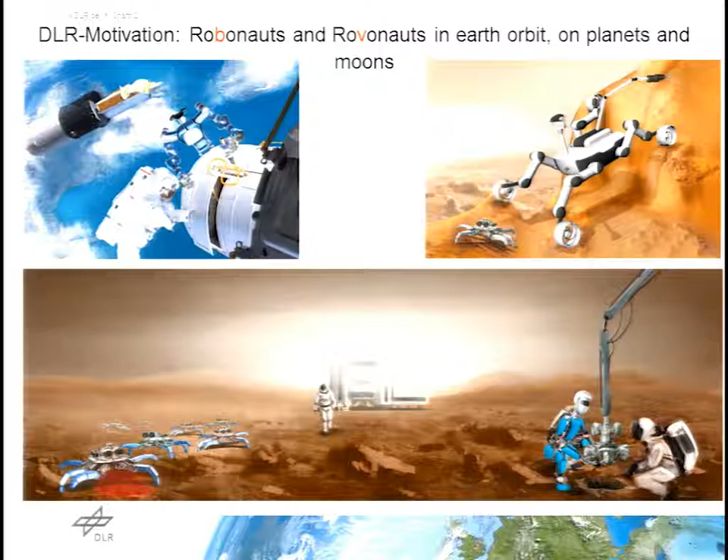I will speak about actuators for robots interacting with humans and unknown environments. Our primary motivation as an institute working in space is to design robots which can interact with completely unknown environments like planets and moons, or are able to interact with humans, with astronauts, to solve complex manipulation and repair tasks.

But of course, generally, the idea of having safe and reliable helpers to humans is as old as robotics, and Isaac Asimov's literature with his famous laws of robotics made this popular. And actually, in direct line strictly related to that are some science fiction movies.

And of course, we would like this robot to move at velocity and performance which is similar to humans, but probably most robotic people watching this movie ask themselves, what would I put into that actuator to have a robot which is that slim and as fast as it is today? And will we succeed in 20 years from now to build something like that?

So this is what my talk is about, our activities towards actuation. I would like to highlight mainly two perspectives in our evolution. We invested in the last 20 years some time in designing lightweight structures where we focused on the mechatronics design, integrated modular components. The main feature is the fact that they have software-based compliance using torque sensing.

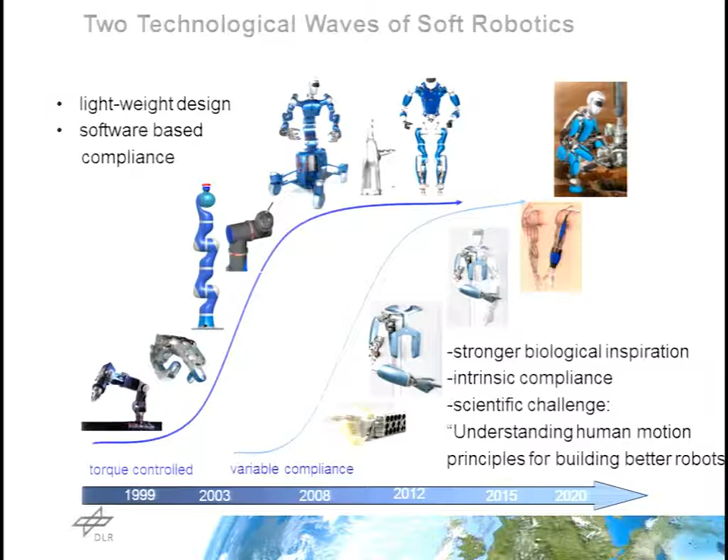So just to summarize the technology which is today considered state of the art, and we were one of the institutes pushing this technology forward, it's standard mechatronic design in the sense that we have brushless motors, which are optimized for high torque at low velocity, harmonic drive gears, but most important, we have the torque sensor, which is placed after the gearbox and allows for compensating of friction and reducing the inertia, such that you have an almost ideal torque source, which has been the dream of robotic control designers for many decades.

And still, these robots intrinsically, parasitically so to say, have some compliance. So you need the torque sensor also to compensate for this elasticity. But this comes parasitically with the lightweight design and was not introduced by purpose at that time. But still, we had to learn how to deal with this compliance, and there has been some seminal work of Alessandro De Luca and Mark Spong, which helped us in that way.

And on top of this torque interface, we have compliant control, again based on great work of Neville Hogan and Oussama Khatib. Stefano contributed a lot to compliance control.

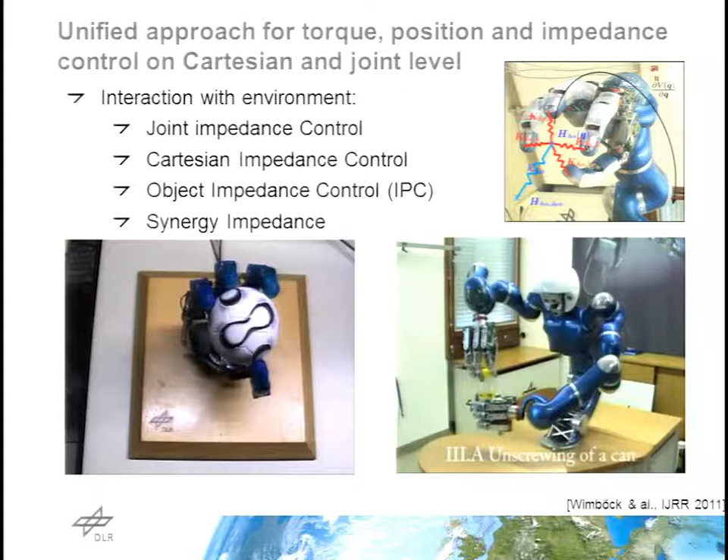The basic idea is that you have virtual springs, which you attach to the rigid robot in order to grasp objects. You would attach springs to the finger, to the middle of the object. And then you would transform those virtual spring forces to joint torques. This is a very simple concept, but can be hierarchically extended to grasp with two arms, to move objects around in several hierarchical structures.

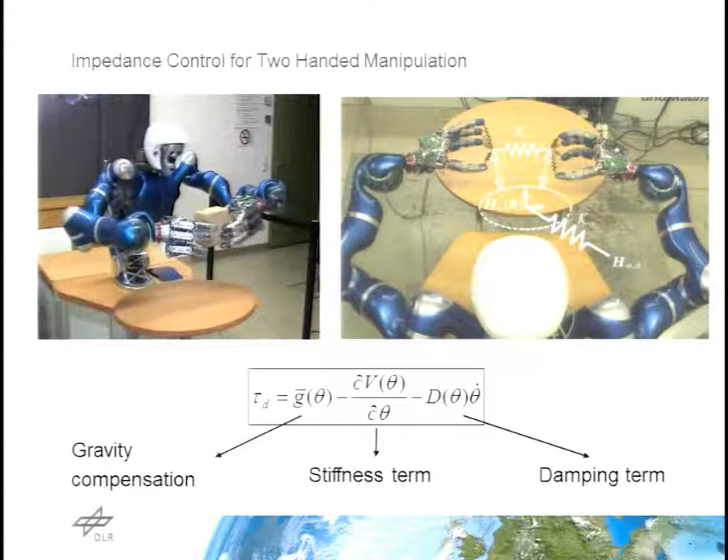And you always do the same. You compensate gravity mostly based on motor position, but you have to take into account the elasticity. And then you have one component which is related to the derivation of the elastic potential, and by deriving this with respect to the joint position, you provide joint torques, and then you add some damping.

This is pretty simple, but we extended this over the last years to more and more complex structures, like the humanoid with 43 degrees of freedom. And here you can see hierarchical tasks: the robot holds the position, follows the human, avoids collision with the second human, avoids singularities, controls the posture, and so on and so forth. But you have to keep in mind that all this structure is purely implemented by control, and the robot is more or less rigid.

You can use torque sensing to detect collision with high accuracy in order to provide a safe robotic system, and this was what we had to deal with when commercializing the lightweight robot technology with our partners from KUKA.

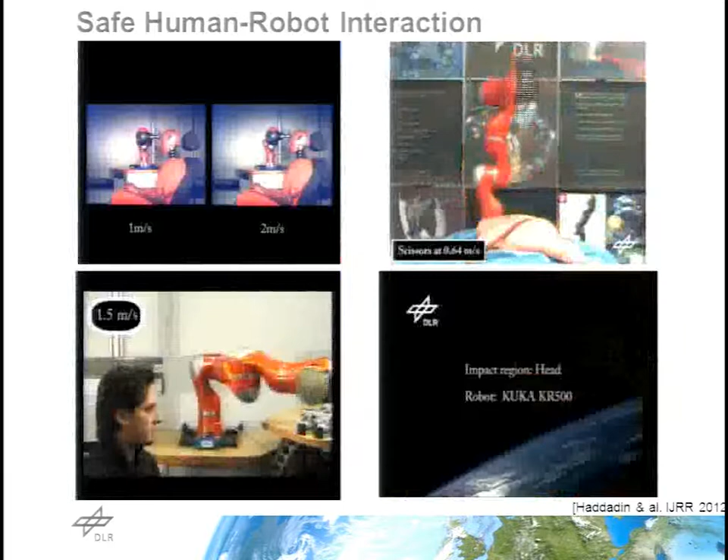This technology, because of its modularity—the whole electronics and mechanics placed within one module—could be extended to more complex humanoids like Justin, and to other application areas like medical. We spent a lot of time commercializing this technology. Many of you know the robot.

The last prototype I would like to show, since I started by motivating with humanoids, is the work done by Christian Ott and his group integrating the lightweight robot components into a humanoid. He started this work after spending time in Japan in Yoshi Nakamura's lab, extending the work we've done on manipulation for several years to balancing on uneven ground.

Intuitively it is clear, but he has methodologically shown that grasping and balancing are closely related—it's a dual problem. Balancing is as if you were manipulating the ground.

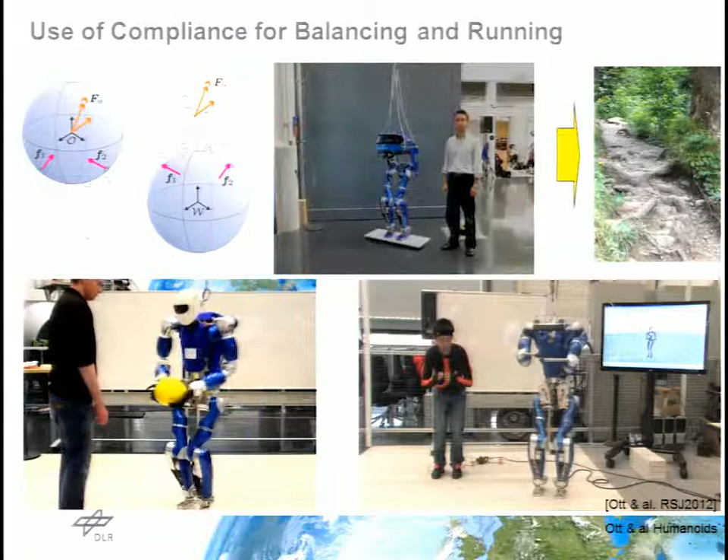Of course, we are not the only ones doing humanoids with torque interfaces, especially with hydraulic actuation. There has been impressive work starting at Sarcos and newer work with Atlas from Boston Dynamics. They use hydraulic actuation with precise torque sensing, and all those robots have very good control performance. However, they have limited power-to-weight ratio, and this is particularly true for electromechanical actuators.

This was one of the main messages at the IROS workshop on actuators, where we saw that many designers still struggle to design actuators that preserve the performance of electromechanical actuators or electric motors, which is very high but drops as soon as you attach gearboxes, becoming much worse than human performance. So we are still searching for ways to improve torque at low velocity in order to achieve biological performance.

One other drawback is important for these systems. If you look at these pictures, you'll notice there's always a cable suspending the robots to prevent them from falling down. Everybody knows why: if such a robot falls down, the control compliance is not fast enough to react, so most probably the robot will be damaged. This is seen in this unfortunate video of Asimo, which is probably the most advanced humanoid—you notice all the controlled compliance and adaptability disappears as soon as software or hardware fails, leaving a rigid piece of metal that will probably break as soon as it falls down.

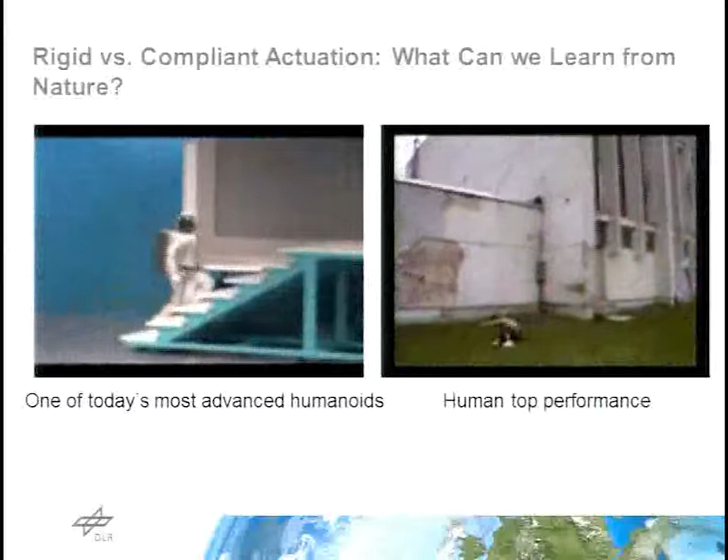This is, of course, in striking contrast with what humans can do, at least at their limiting or high-end performance. This motivated researchers over the decades to think about deliberately introducing elasticity into the system.

It's easy to see why on this picture showing a parkour athlete. He uses the elasticity of the tendons and muscles first to store energy when jumping and produce explosive motion, and on the other side to absorb energy at impact when falling down, limiting peak torques at impact in order not to damage the muscular structure.

Interesting technology. One drawback might be that due to the very high compliance, bandwidth is limited, so as soon as you want fast motion to react quickly, this becomes a limitation. High accuracy in positioning is also a challenging task—we've seen that even for the lightweight robot it's a challenge to deal with compliance, and in a compliant structure this is even more difficult.

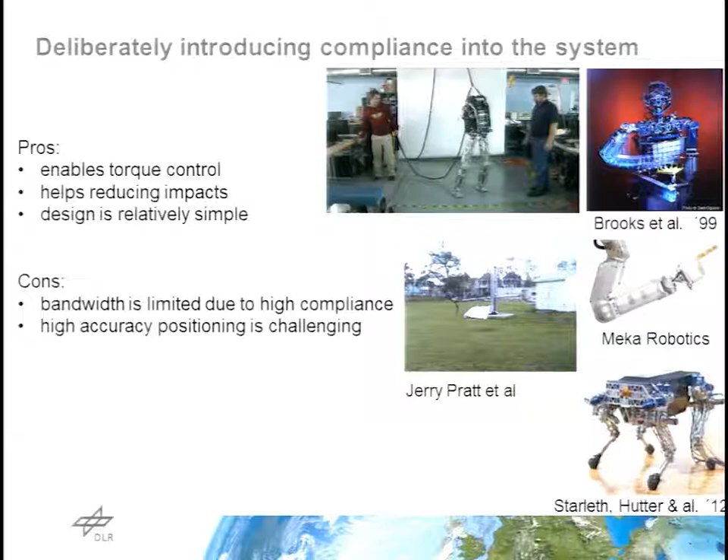This motivated groups worldwide, particularly a pretty large group in Europe, to think about systems more inspired by biology, looking at how antagonistic muscles are used to generate motion and robustness. Antagonistic muscles can move the joint but can also co-contract to change stiffness. A simple example of how you can translate this into a mechanical system is using two motors with two tendons.

And by moving the motors, we will move the link. You need a nonlinear elastic element, but by pre-tensioning the strings, by increasing the tension in the cables, you could increase the apparent stiffness of the system.

And most important, if you have an impact on the output, as in the video below, this impact goes directly through the springs and will not affect the motor,

preventing the system from being damaged. Of course, this basic principle has one drawback: you have two motors, but you only have the torque of just one motor in each direction. So you are wasting space and volume compared to classical actuation.

And that's why we spent, in several European projects, a lot of energy designing different concepts to avoid these problems, to improve the power-to-weight ratio of the systems, increase performance, reduce friction, and increase efficiency. We had prototypes based on pneumatic actuators, also some hydraulics, a lot of electromechanics, variable stiffness, variable damping, even new soft actuators like electroactive polymers.

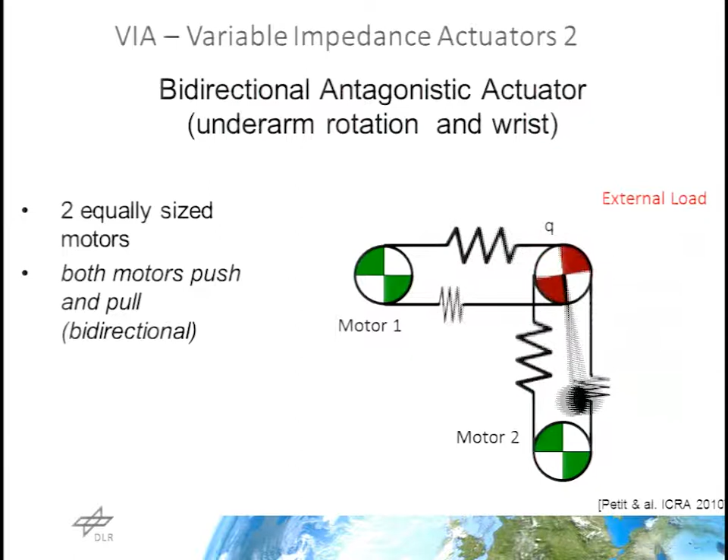And again, the impact goes to the springs and not to the system.

Another way to save weight, if you don't want to change stiffness quickly, is to use one large motor, for example with harmonic drive gears, to move the joint, and then just use a smaller motor with a high gear ratio to pre-tension the springs and change the elasticity of the system.

But obviously, each design has some advantages and some drawbacks, and it's hard to compare them with just one number, as we thought initially when we started this work. Instead, we had some very intensive debate and came out with a list of characteristics which describe this kind of actuators.

So in addition to the classical power, torque, velocity, and so on, you need, for example, to describe the stiffness range of the actuator and how the stiffness range changes when the torque changes, how fast you can change the stiffness, what's the maximal energy you can load on such a system, and so on.

So we came out with a standard data sheet, and you will find on our project website, and also meanwhile on the Natural Machine Motion Initiative website, I think, the description of more than 10, about 15 actuators in this standard way. This should make comparison easier, and also help choose an appropriate design for your application.

Just two examples of very, very different applications. At DLR, we focused on highly integrated, very complex prototypes in which we try to mimic the performance of the human arm as well as possible.

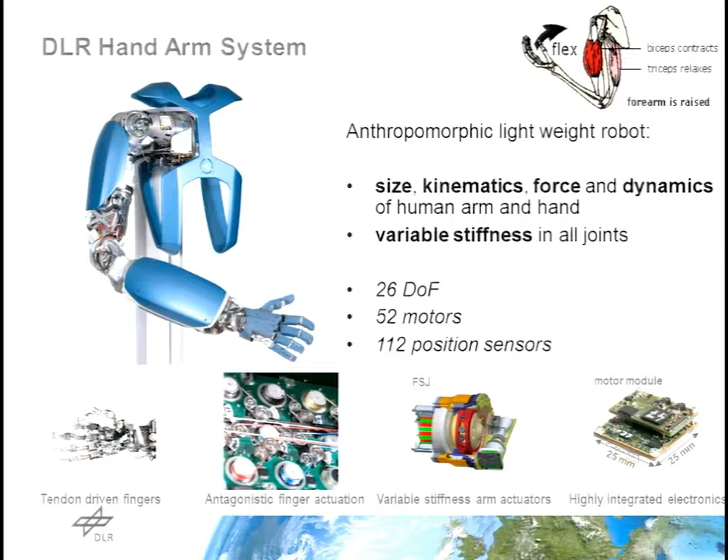And because this is a first system which we built and wanted to experiment with different designs, we introduced this antagonistic actuation, but also this bidirectional antagonistic actuation, and also the design with a harmonic drive with a small gear pretension, just to compare these different approaches.

And here I show a video which we developed for the Automatica Fair last spring, showing the main features of variable compliance actuation. This is a task in which, first of all, you have to grasp an object and hold it robustly, also during impact.

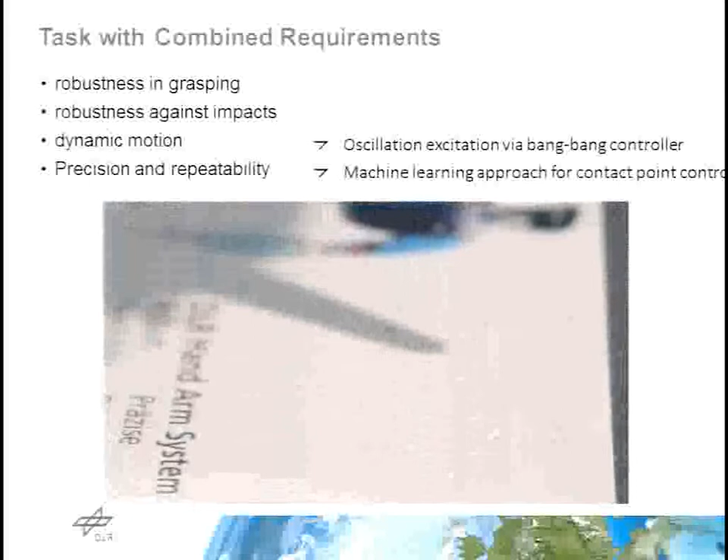Then you have always a hard impact of metal parts which would damage standard robots. Then you are using dynamic motion. Actually, this is done in resonance by using the springs. And still, this is very precise and repeatable. You can see that we have, by using a learning technique, accuracy below 1 millimeter with iterative learning control. This is the DLR logo, which has been printed there.

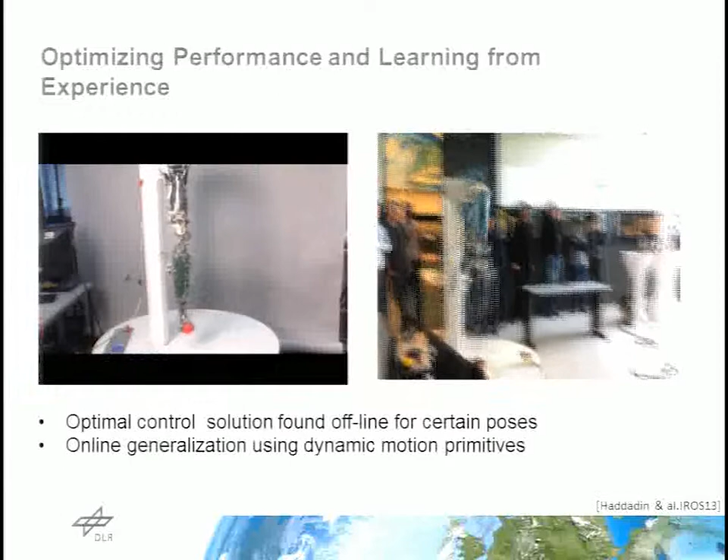So I think altogether, you need variable compliance to have all these features in one system at the same time. Some videos summarizing the main features: robustness. You could not do that with a rigid robot. You need series elastic actuation or variable compliance to withstand such impacts. I mentioned before, control cannot react so fast. Explosive motion, storing energy to throw objects, is also essential, and requires compliance for that.

What we focused more and more on in the last years and months was cyclic motion generation. I gave a talk at the workshop on Sunday, so I won't go into too many details, but variable compliance and compliant actuation in general is essential for this kind of motion. We noticed the community still has difficulties deriving controllers and planners which really excite these elastic systems into resonance. The reason is that we still lack a precise mathematical description of resonance for nonlinear systems, and optimization tends to take very long and breaks down for many degrees of freedom.

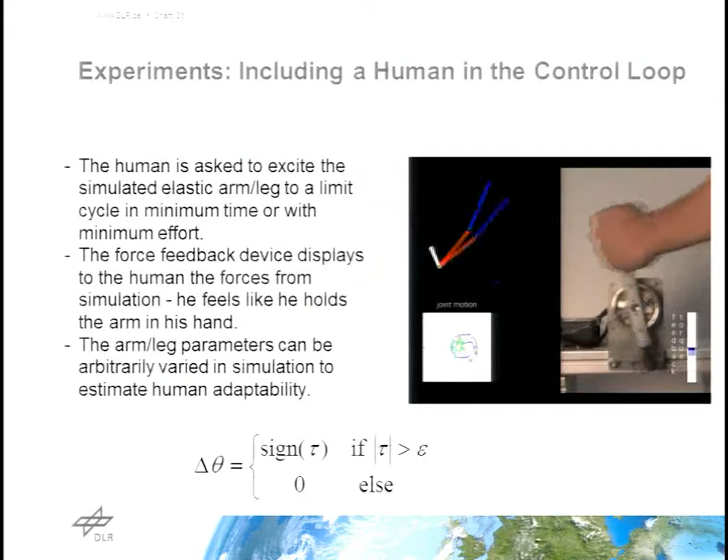So that's why we did some experiments - we tried to understand why animals, and in particular humans, are so good at exciting elastic motion. The experiment used a virtual reality device, asking humans to excite the motion of simulated robots.

We found that for one degree of freedom, the law is very simple. If you ask people what they do, they would answer: we wait until the torque is high enough, then we introduce energy by giving a jump in force or in position. This is simple for one degree of freedom.

I won't go into details for more degrees of freedom, but the essential idea is that one could scale this concept to the multidimensional case by trying to identify the first oscillation mode of the system and exciting that using this bang-bang controller idea. To achieve that, one uses an adaptive mapping between the n-dimensional torque and the one-dimensional direction of the principal mode.

This mapping is adapted by a learning technique. Then in this one dimension, tau z in this case, we excite the oscillation motion, and then project back into position space.

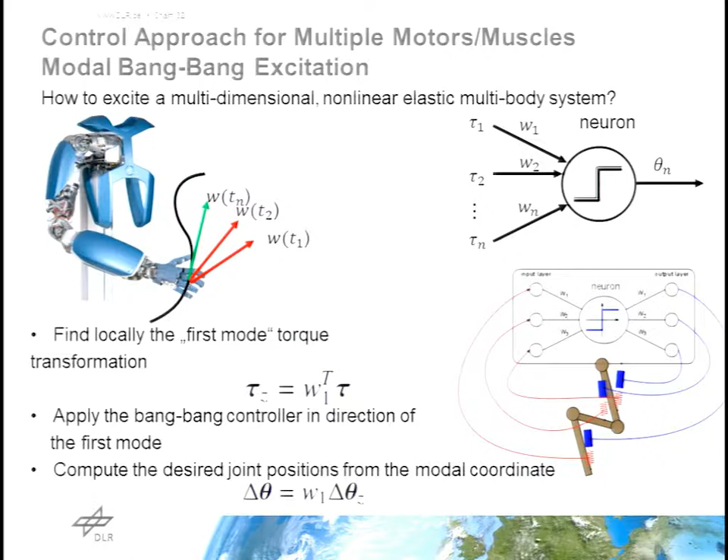And all in all, although the control law has been derived using pure robotics tools, it can be shown that this can easily be mapped to a neural network with a fan-in, fan-out configuration, and with just very few neurons, which, by the way, can also be trained with pure Hebbian learning, which is biologically plausible. With very few neurons, you can train to excite limit cycles without model knowledge, more than kinematic information of the system, which is an interesting fact.

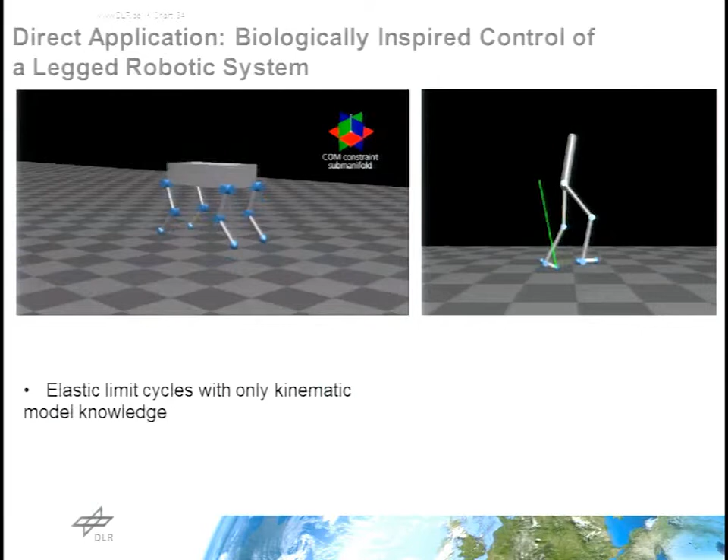We hope this idea can also be applied to designing running systems. We did some simulation work, and had several discussions with people already building series elastic locomotion systems, like ETH or Oregon State University, and hope to apply this to locomotion, where elasticity is probably most relevant.

With this I'd like to come to a conclusion, showing that we are at a point where I think the design of our robots is so close to human biomechanics and human properties that we can really, by recreating these functionalities in robots, learn about the structure and control of humans, and at the same time use this knowledge to improve our robots and bring this benefit back to humans through better rehabilitation devices, prosthetic devices, and assistive devices.

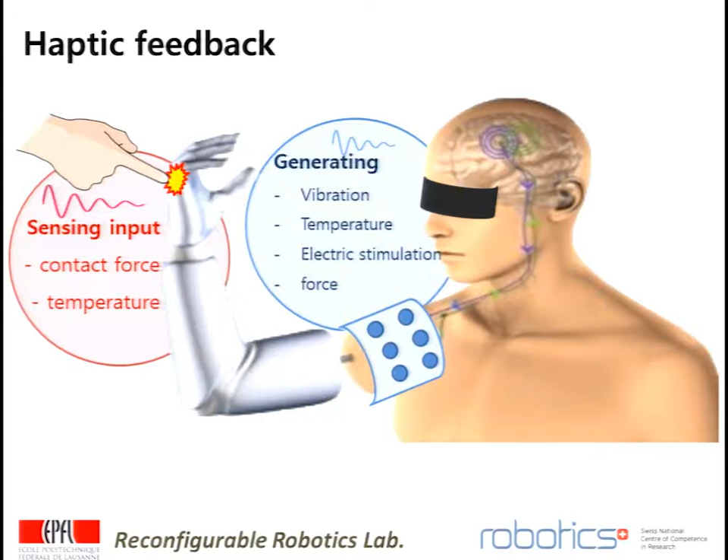Human skin can decipher a wide range of vibration and haptic feedback. This, of course, depends on surface and material. Vibration is characterized by the combination of amplitude, frequency, and direction of the signal.

Currently, there are many kinds of vibration motor. However, the choice is limited, as most of them are very thick and heavy and have only one linear direction of vibration.

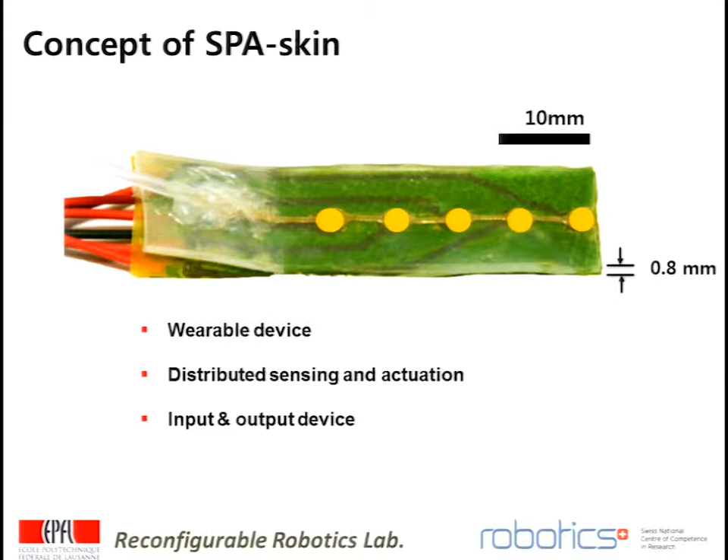SPA skin is a novel vibration actuator embedded with a distributed sensor that can produce highly customizable, lightweight input-output devices for tactile feedback. SPA skin has multiple points of actuation, which are all embedded with a discrete sensor, here 5. They can not only sense its own vibration, but also measure external force as well.

This SPA skin design can be accommodated in multiple configurations, so it can cover wider and curvier surfaces for actuation and sensing. This customizability allows SPA skin to be ideal for wearable robots, covering different locations on the body.

This figure shows application on the hand and forearm, but you can easily see the application on the shoulder and chest as well. What is shown here is the sensor embedded actuator with 5 actuation points. The frequency is 25. The 5 boxes show the sensing location; they stay green and blink for each actuation, and turn red for external force.

The main contribution of novel SPA skin is that we have presented a high-intensity vibrotactile feedback hardware that remains highly flexible, a lightweight wearable device, and distributed sensing and actuation allows it to be applied to many kinds of applications.

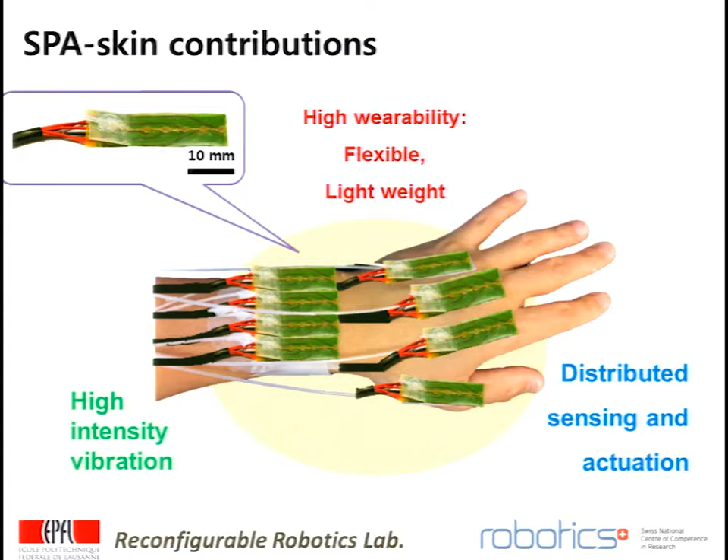I'm so excited about this completely different vibration actuator, so I hope to see you in the interactive session. Thank you.

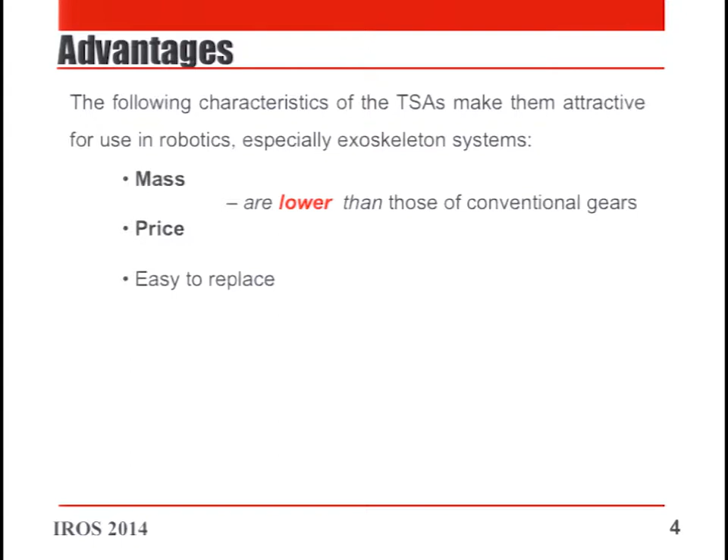The TSA has several fascinating features, especially in robotics or exoskeleton kind of systems. It is very light and also cheap and easy to replace, and can transmit power over a distance, and is intrinsically compliant and also backdrivable. The motor can be placed coaxially with the axis of motion, so we can save lots of space in designing. It can also tolerate some misalignment, so it can apply to soft and wearable exoskeleton systems and wearable devices.

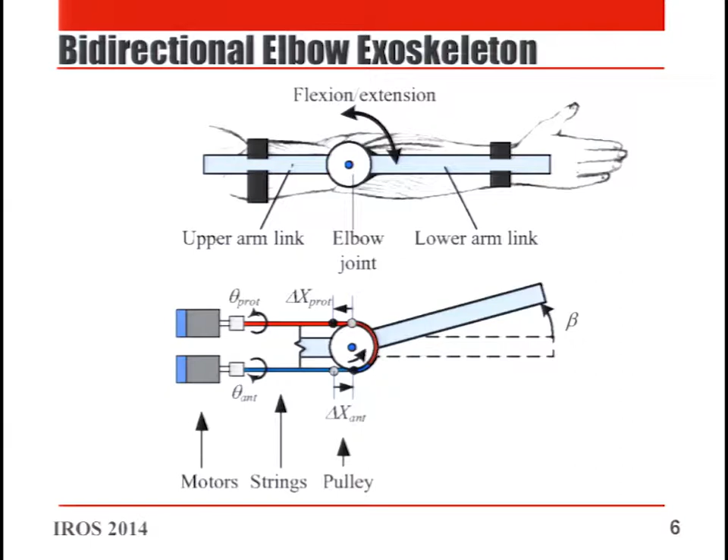By twisting and untwisting both of the wire strings at the same time, we can adjust stiffness - high stiffness and low stiffness. One interesting feature is that due to the backdrivability, we can easily detect human intention, which can help trigger the motion of the exoskeleton system.

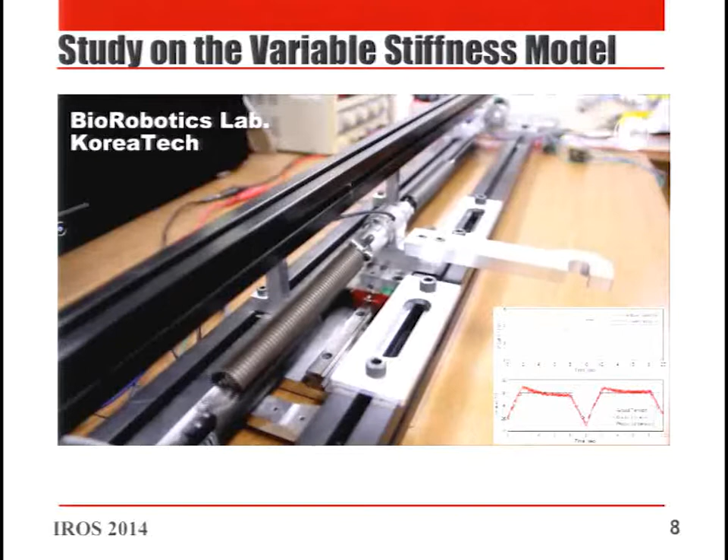In this paper, we have done some study on the variable stiffness model, because we know we can change the stiffness, but we didn't know the exact relationship between the amount of contraction and the stiffness variation. So we made a variable stiffness actuator module and did some study about this.

As a result, we found that we can control the position and the tension independently. So if you want to know more, I want to see you in my interactive session. Thank you.

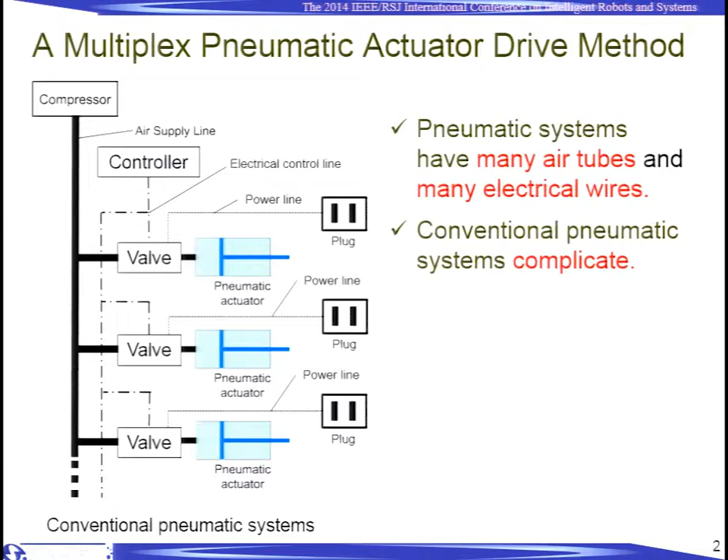Pneumatic actuators have been widely utilized in various fields. However, pneumatic systems have many air tubes and many electrical wires, so conventional pneumatic systems become complicated to use with many pneumatic actuators. To solve this problem, we propose a multiplex pneumatic actuator drive method.

In order to realize this method, it needs two key components: first, an acoustic communication system; second, a power supply device. The acoustic communication system makes it possible to control each actuator independently through acoustic communication in an air supply line.

The power supply device generates electrical power from the energy of compressed air, and it realizes an off-grid local controller. Therefore, it's possible to realize the miniaturization of the pneumatic system without electrical control lines.

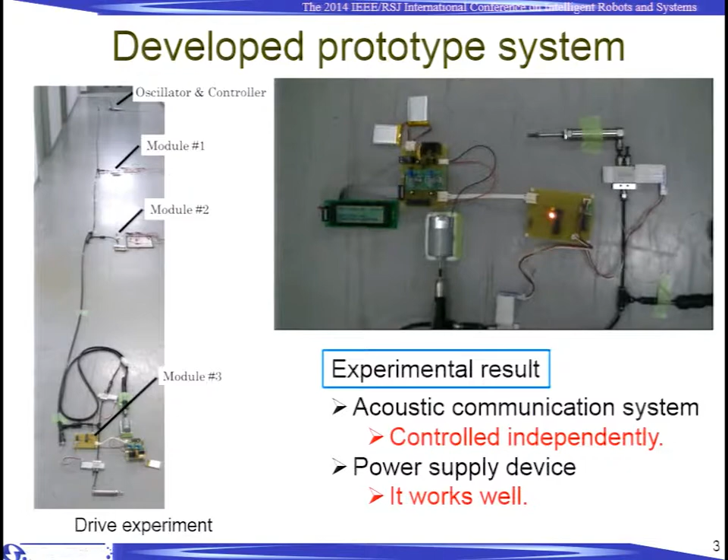At Disney, we are very interested in creating compelling interactions between people and robots. While human safety is an absolute requirement, we are not willing to sacrifice speed or expressiveness.

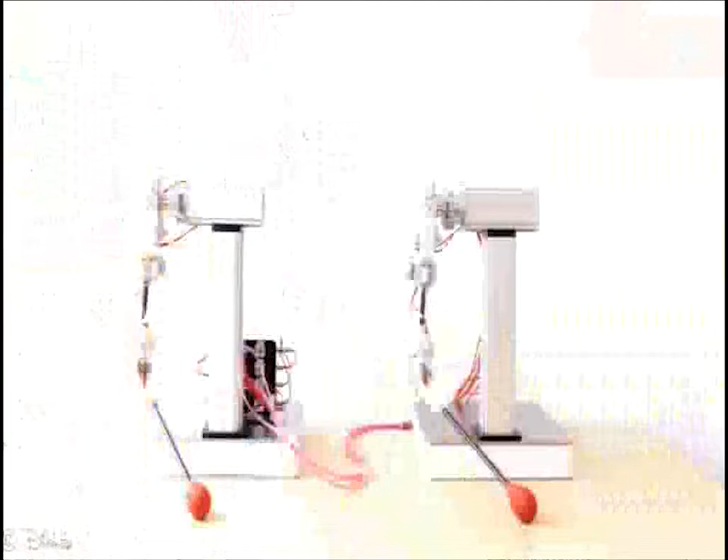This pair of 4 degree of freedom robot arms are identical and connected only by pneumatic tubing, without any motors, sensors, valves, or controller. The key element is using rolling diaphragms to seal the cylinders. They provide a hermetic seal, and their rolling motion eliminates static friction, in contrast to conventional sliding seals.

We use pairs of cylinders to allow bidirectional operation, with the transmission fluid pre-pressurized to half the maximum operating pressure. This removes all backlash from the system.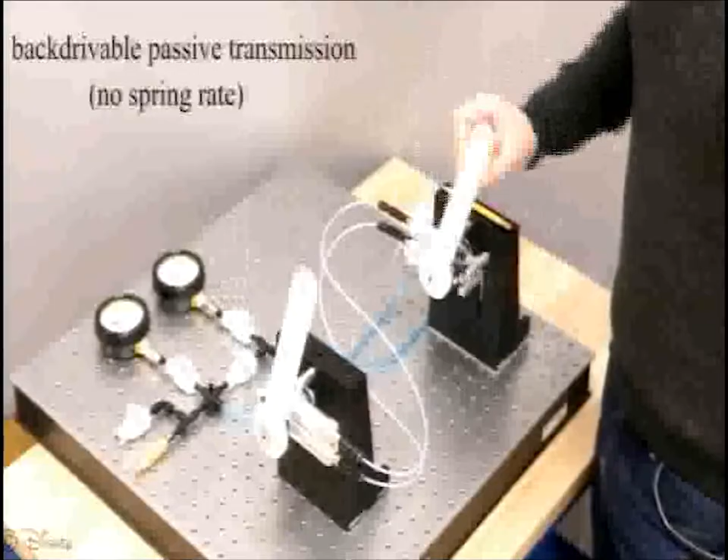The transmission has very low impedance. There is no spring rate, and because of the transmission's symmetry and low friction, it is completely backdrivable. The transmission is used passively for remote manipulation, as in the robot arm, or may be motorized at one end. Since it is fluid-based, we achieve high torque density at the endpoint actuator.

The arm or limb is much lighter than if a geared electric motor with equivalent friction and torque performance was located directly in the arm instead. With water as a transmission fluid, we achieve high stiffness and no lost motion between input and output. Fluid-based transmissions allow flexible hose and tubing connections and provide easy and adaptable routing. This transmission is capable of moving heavy loads at high speeds with very smooth motion.

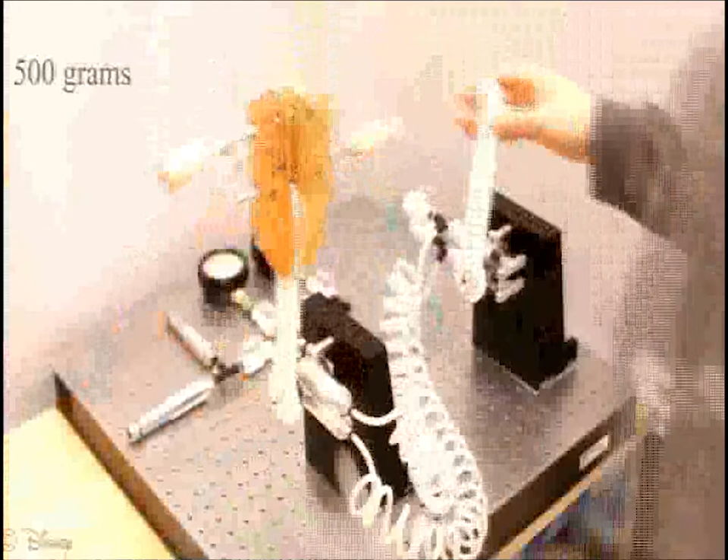The end-to-end delay through the transmission is only 12 milliseconds. Under high-speed video, you can see here.

The water-filled transmission achieves a force bandwidth in the tens of hertz. Combined with its high stiffness and low static friction, we find unexpected haptic performance. Surface textures can be felt through the transmission.

In the latest version, the actuators weigh 120 grams, can deliver 4.5 Newton meters continuous torque, and have 135-degree range of motion. Please come to our interactive session.

We have brought the robot arm with us. You can practice your glockenspiel playing.

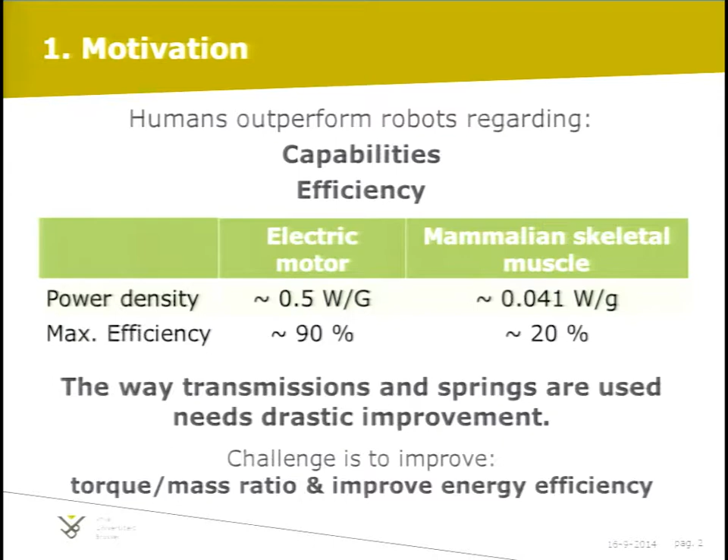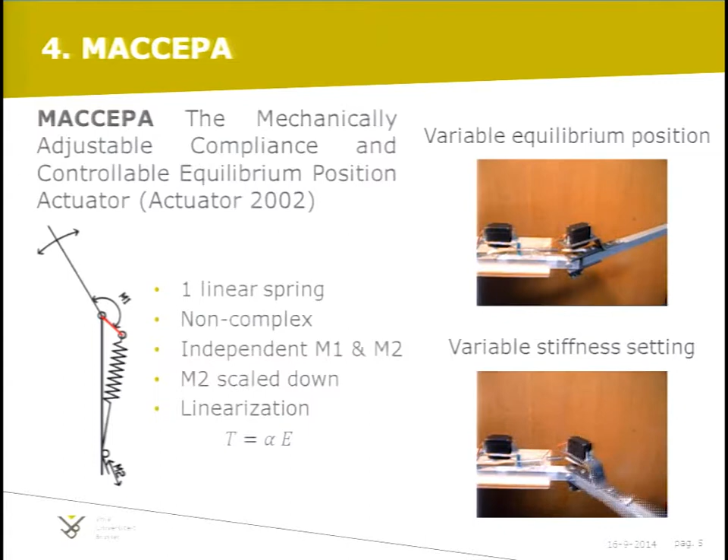The system is based on the MACCEPA actuator, which was developed in our group 10 years ago. The MACCEPA actuator is a variable stiffness actuator, so you can change the stiffness and the equilibrium position independently. The virtues are the fact that there's only one spring, which can be linear, and the mechanism is non-complex. So my goal was to keep these virtues and transform this into an SPEA actuator.

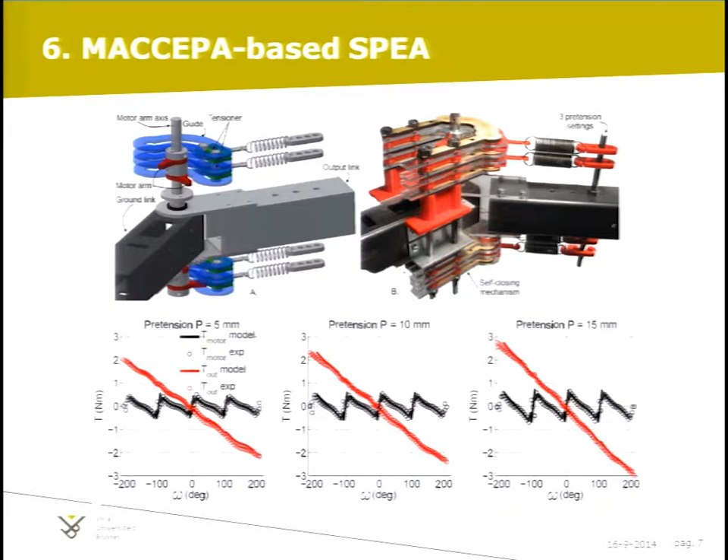I would like to end with a video where you can see the working principle. The motor is rotating continuously while the springs are intermittently tensioned to the other side, and the self-locking mechanism ensures each spring stays locked. When the motor is at the outer position, you have the highest output torque, but at that point the motor itself is not loaded anymore.

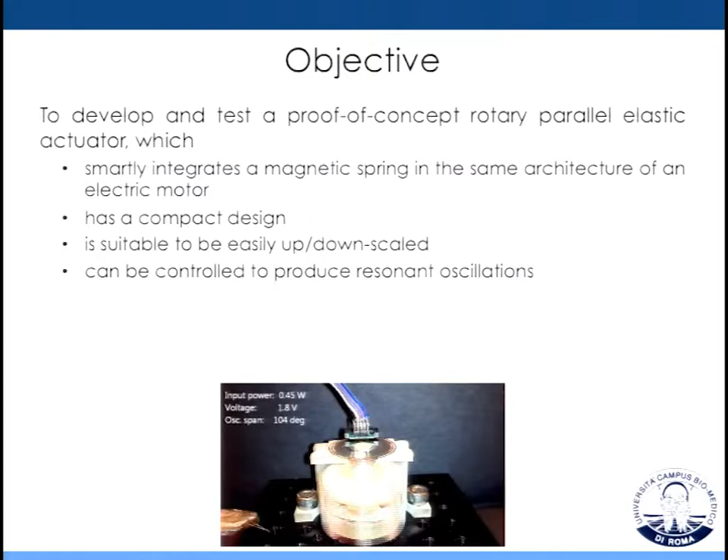Today I'm going to present work on a compliant actuator for biorobotics. More specifically, the aim was to develop a rotary parallel elastic actuator, and our proof of concept prototype was quite novel because it integrates a magnetic spring in the same design as the motor. This allows a very compact architecture, which is also suitable to be scaled up and down, and it's also possible to produce resonant oscillations. To the best of our knowledge, our proposed solution is the first in the literature in which compliance is intrinsically embedded in the actuator.

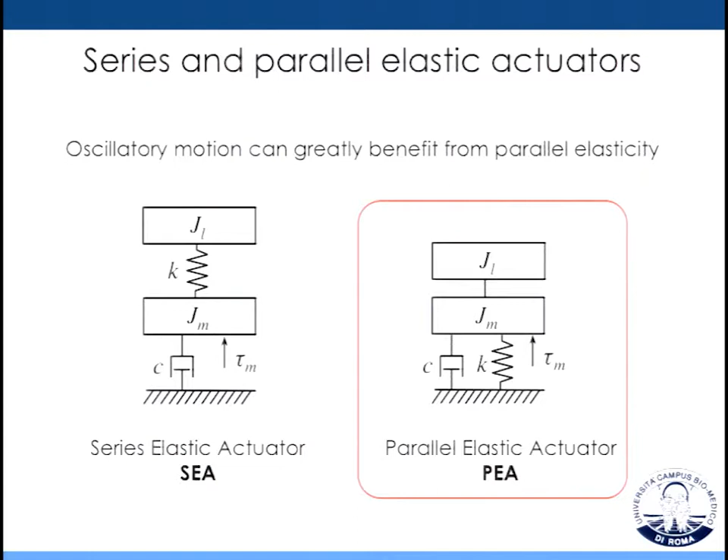I don't want to go into detail since we've already heard many talks about the importance of compliance in actuators for locomotion applications. These are some examples. Of the two big families we know, series elastic actuators are the most popular, but parallel elasticity is also very useful for producing efficient oscillation, as seen in some examples from literature. For instance, in some insects, the parallel elasticity of the body allows the production of elastic torques that help drive the oscillation of the wings.

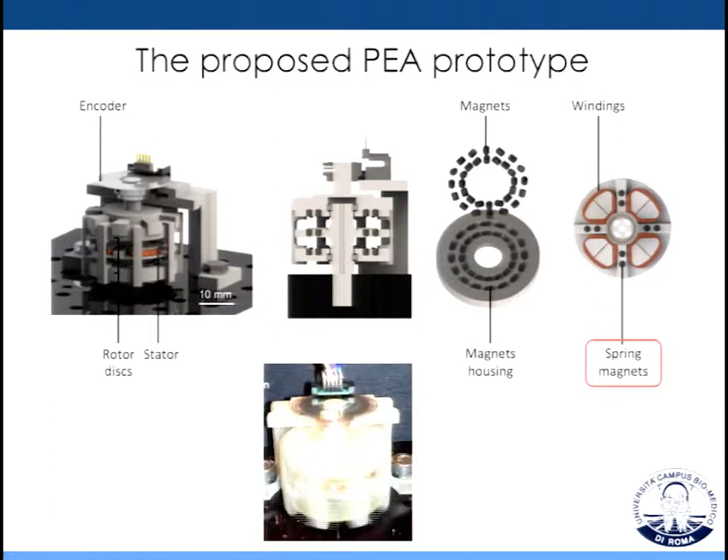Our actuator basically consists of a stator with windings and two rotors with magnets in a Halbach configuration. But the key idea is to add some magnets in the stator so they can be coupled to the magnets of the rotors and produce elastic parallel torques that help the oscillation, as shown in this video.

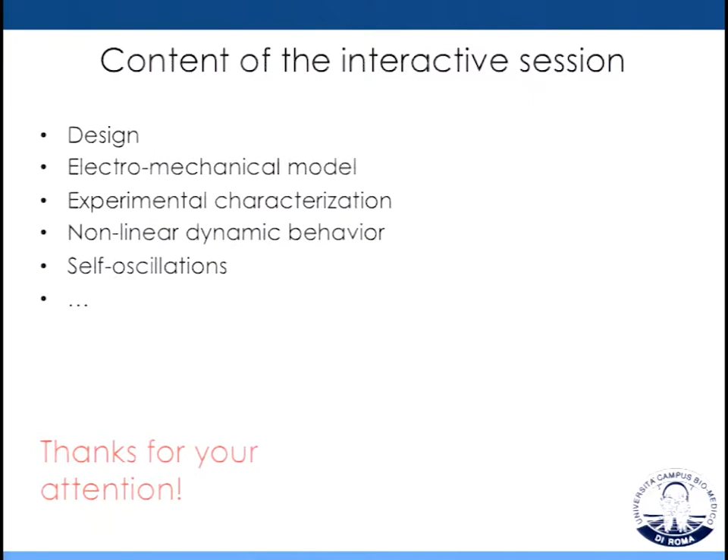Today I'm going to tell you about work that I've done with my advisor to take McKibben muscles, or air muscles, and create them as self-sensing actuators. For those of you not familiar, McKibben muscles, or air muscles, are soft pneumatic actuators that contract axially when pressurized with air. These sorts of actuators have been used to create all kinds of non-traditional robots.

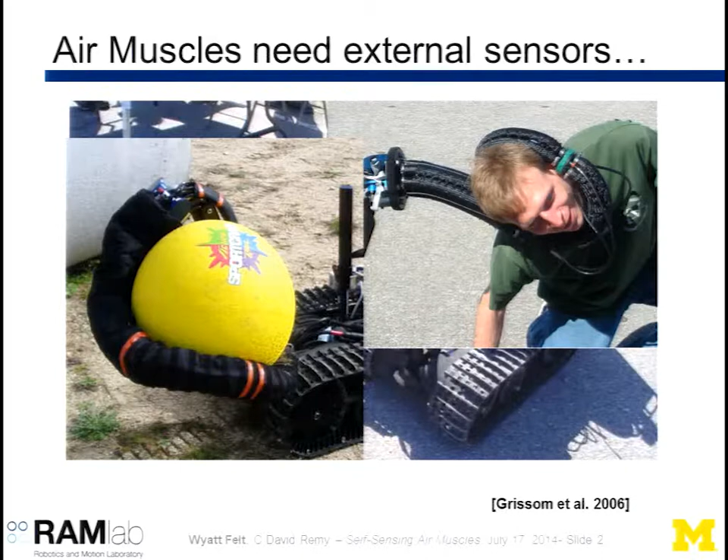Take, for instance, this continuum manipulator developed at Pennsylvania State. This manipulator is great - it can pick up large balls, it can pick up small balls - but with these hermetically sealed actuators that work well in wet and dirty environments, they're still relying on traditional bulky encoders at the base of the manipulator. Here they have string potentiometers. So we have an actuator well suited for these non-traditional robots and environments, yet we're using encoders that are vulnerable to those conditions and require traditional structures.

It would be nice if these actuators could sense their own position and force output, just as biological muscles do. The way we propose to do this is by taking the reinforcing braid that forms the contracting element of the actuator and making it into a circuit.

This is done by forming the braid out of insulated conducting fibers and connecting them together. This way, the current moves along these helices, up the axis along one helix and down along the other, constantly circling the axis in the same direction. So in some sense, we've created a solenoid. If you look at the behavior of this solenoid as the actuator contracts, you can see the cross-sectional area expands and the length changes with the contraction of the actuator.

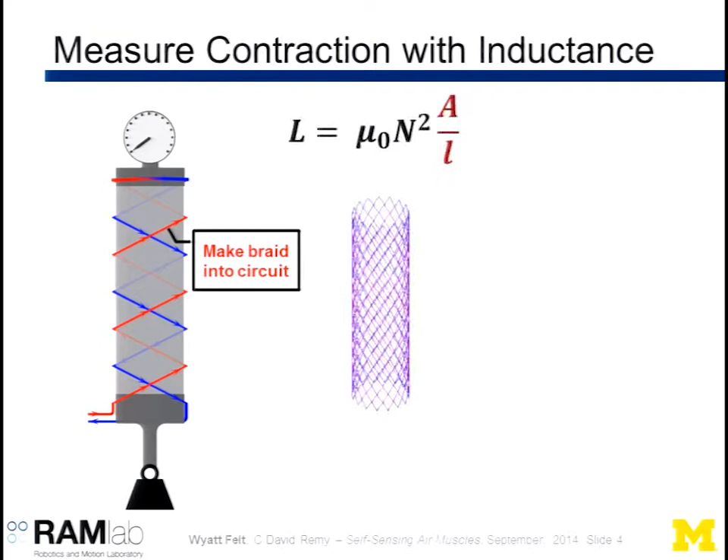If we look at the inductance formula for a solenoid, we can see that an increase in area and decrease in length both result in an increase in inductance of the system. So we're able to characterize this change in length in the actuator by looking at the inductance of the system.

Now, in a method similar to a strain gauge, we can characterize the force output of the actuator as well. A load increase on this system results in stress in the wires that we can measure through changes in resistance. So by measuring both the resistance and inductance of the wire, we're able to characterize the force output

and change in length of the actuator. Now with the prototypes we've been able to develop, we've seen a high sensitivity linear response over the contraction range, and this has allowed us to characterize the contraction with sub-millimeter resolution.

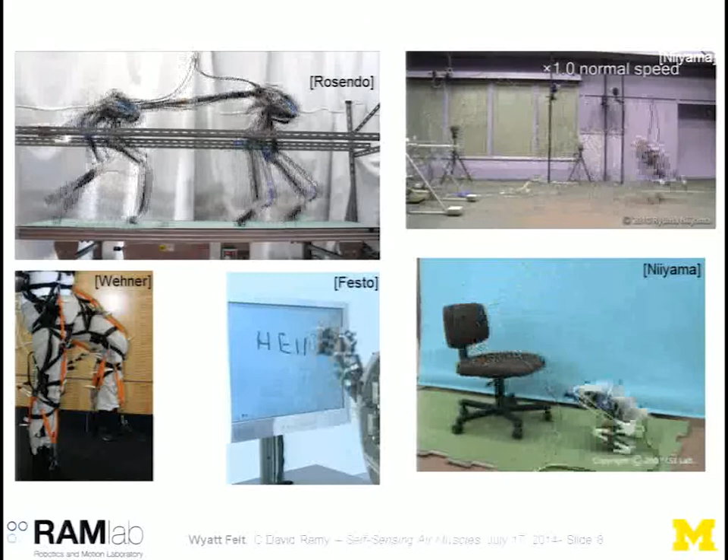Now we're very excited about the applications that this technology could bring, the sorts of robots it will enable us to build with non-traditional joints. If you're interested in learning more about our work, or where we're interested in going with this, please stop by our booth at the interactive session. Thank you.

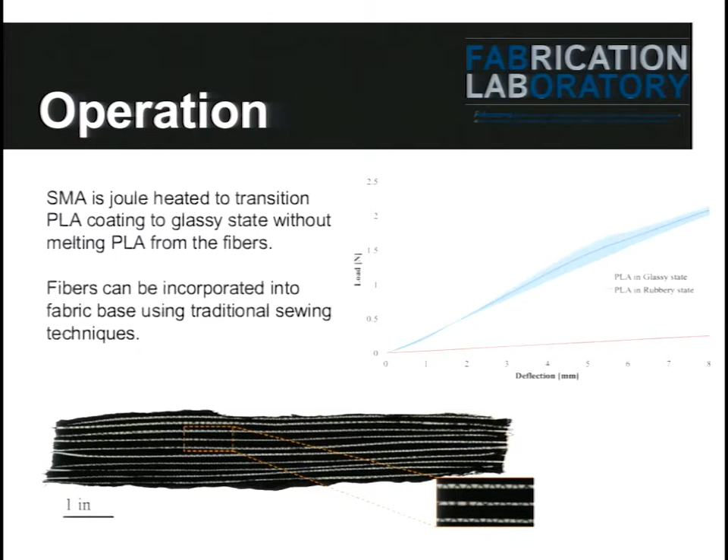To give you some idea of how this might be used, this is an example of a finger brace application where we're able to use the brace to hold the fingers in a particular location. Upon heating it, we can then move the fingers to a different location, remove the heat, and then lock the brace in place.

Through that, one of the challenges we're currently working with is that by heating that material, we do have a human interaction issue - we can cause burns, but it is something we're working on. Again, if you have any further questions, I look forward to entertaining them at the interactive session. Thank you.

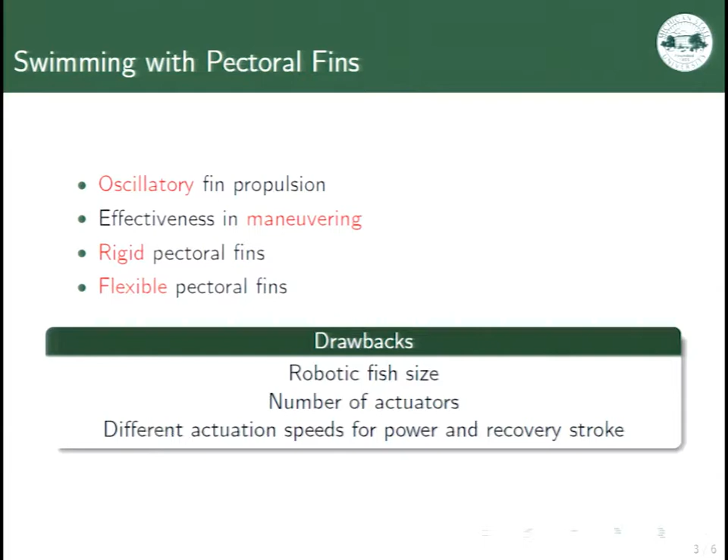The drawback to designs connected to the body through rigid connection is that they may need different actuation speed for power and recovery stroke, and they have one degree of freedom. If you want to add another degree of freedom, you have to add another actuator, which would increase the robotic fish size. So we came up with a novel design for a flexible passive joint, which overcomes all the drawbacks I mentioned.

The joint is designed in SolidWorks and is 3D printed as one integrated piece. The stopper is actually what enables the robotic fish to have a symmetric power and recovery stroke speed.

We also modeled the robotic fish utilizing such a joint. The hydrodynamic forces on the pectoral fin were calculated based on blade element theory. The actual passive joint is modeled as a pair of torsion spring and damper. By having all the forces and moments on the robotic fish center of mass, we are able to fully calculate the robotic fish behavior.

We put the robotic fish under a lot of experiments to evaluate our dynamic model, such as forward velocity, turning radius, and period. We also focused on the flexible passive joint dimension and stiffness in order to optimize our design for the passive joint. Finally, we compared the performance of the robotic fish with the traditional rigid connection versus our proposed flexible connection.

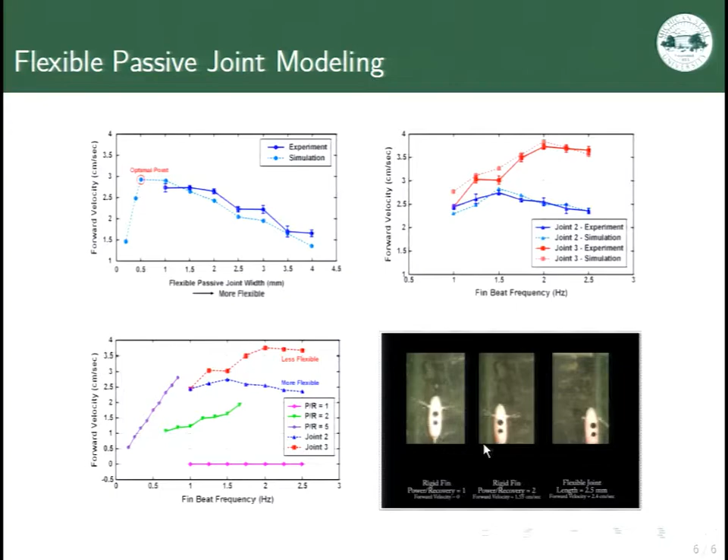Today I talk about formulation and optimization of pulley gear type shape memory alloy heat engine toward fluidic MEMS motor. This research is conducted mainly by colleagues of Yokohama National University, and also supervised by Professor Carl at University of Washington.

The first motivation of this research is how to actuate the micro-robot. One popular conventional method is remote manipulation by magnetic field, like a capsule endoscope used in medical applications. In this case, we control only one robot under monitoring.

When we realize the fluidic microactuator, we think there are two main challenges. One is the energy harvesting problem. One cubic millimeter is too small to install a battery inside, so the actuator itself should harvest energy and convert it to kinetic energy directly, and it must work in liquid.

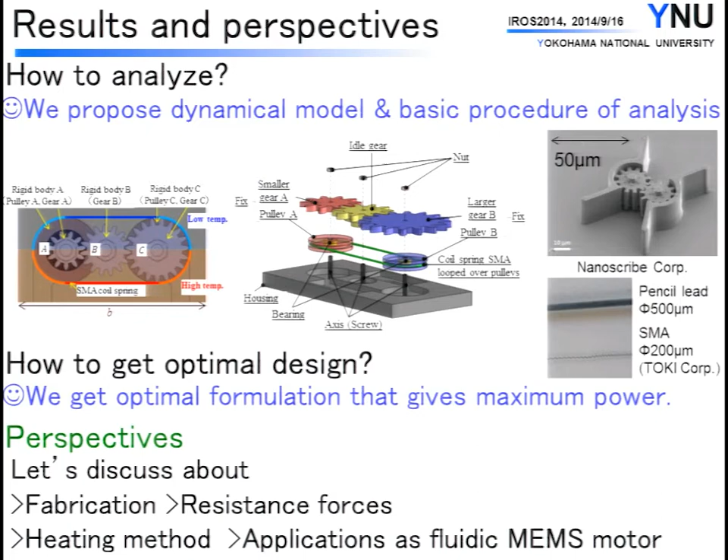So basically, we're presenting a connector for the purposes of physically attaching two robots or components of robots, in this case in the 2D plane. This connector we're trying to design has high capabilities in terms of alignment and strength.

The reason we use passive mechanical geometry here is because we're trying to avoid complicated additions to the robot, such as power, actuation, and sensing in the connection faces, which can complicate the design.

If we look at why we're doing this a little closer: in particular, we want high alignment because in many modular robot systems, we're connecting and disconnecting frequently, and it may be at the end of a long chain in a chain-type modular robot, for example.

In a chain-type modular robot, the errors accumulate according to second order relative to the number of modules. So this can build up rather quickly, and having a good way to correct the error without adding design complexity is very nice.

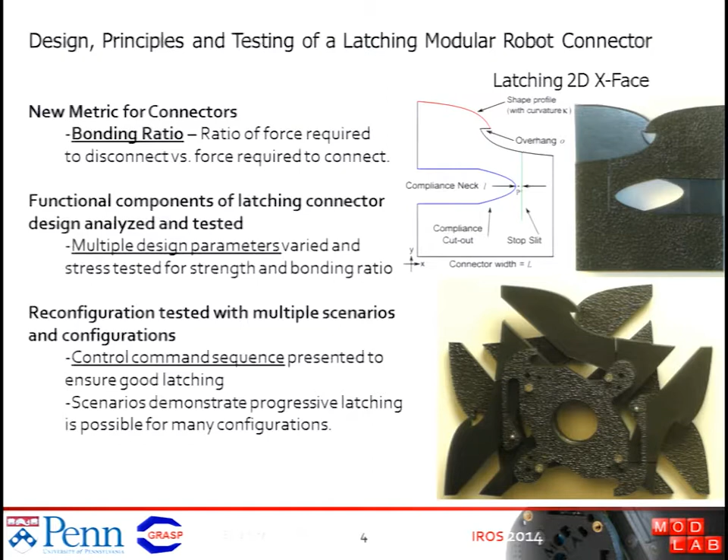We've also demonstrated several scenarios, including progressive latching, showing that you can do it in a zipper fashion at the end of a long chain, and a control sequence to ensure a good latching fit.

You'll see in this video a 12-module chain that successfully latches using the connector. You can see it goes past the nominal latching point a little bit and then relaxes, just to ensure a good fit.

So pretty much that's it. If you have any questions about the control sequence, the latching connector, or the principles behind it, I'll have all the information for you at the interactive session. Thank you very much.

Good afternoon everyone, my name is Manas Tanapi. I'm a recent graduate from Clemson University, and I'm here today to present my work with researcher Dr. Gorage and my advisor, Professor Dr. Walker. This was an intermediate part of my master's thesis.

The objective was to develop a new type of long and thin continuum robot which could be used for inspection and exploration activities, especially in space. The motivation for such robots can be said to be the endoscopes used in minimally invasive surgery, or in nature like the anteater's tongue and tendril used by climbing plants.

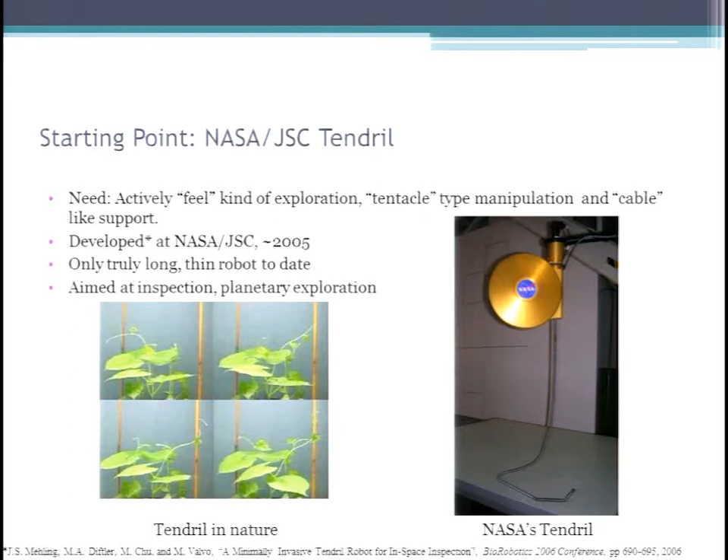Their flexible and shape-adapting structures were emulated for the first time by NASA in its tendril, especially focusing on the unique sizing constraints. However, detailed study of tendril at Clemson suggested that structural improvements were essential in order to have a practical or application-oriented control. Hence, a detailed comparative study of the current state of the art was conducted.

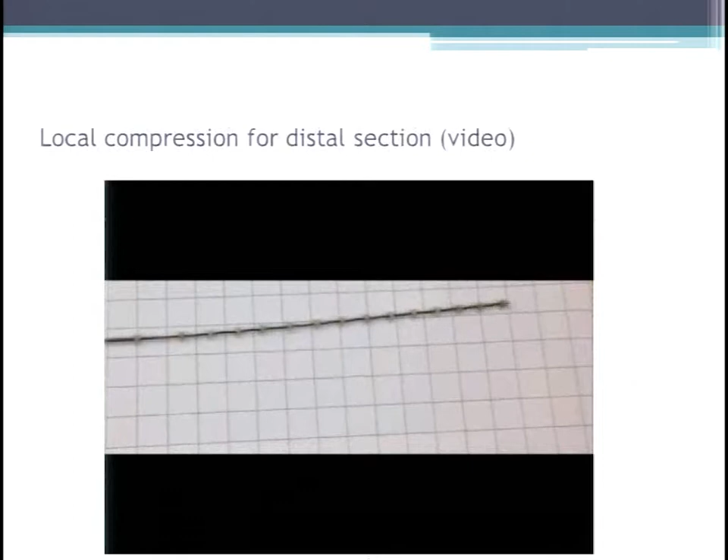This study suggested that a superior design was possible by incorporating features of a concentric tube robot in a tendon-based design. This would help to provide local compression as seen in this video, along with multi-section bending, which is seen in continuum robots.

Now, since this was intended for space applications, the actuation unit needed to be as compact as possible. Hence, springs were utilized in the design so that linear actuators, which is normally a bulky system, won't be needed. A simple motor encoder system, controlled by an Arduino, formed this compact actuation package.

The kinematic modeling needed to incorporate the spring loading, and hence a compression factor was introduced in the established kinematics.

In particular, in order to achieve the different configurations or shapes of the robot, it was essential to map the measurable quantities with the different shapes of the robot. For this purpose, experiments were performed with the cable robot hardware, and data was collected from the sensors and the robot shape.

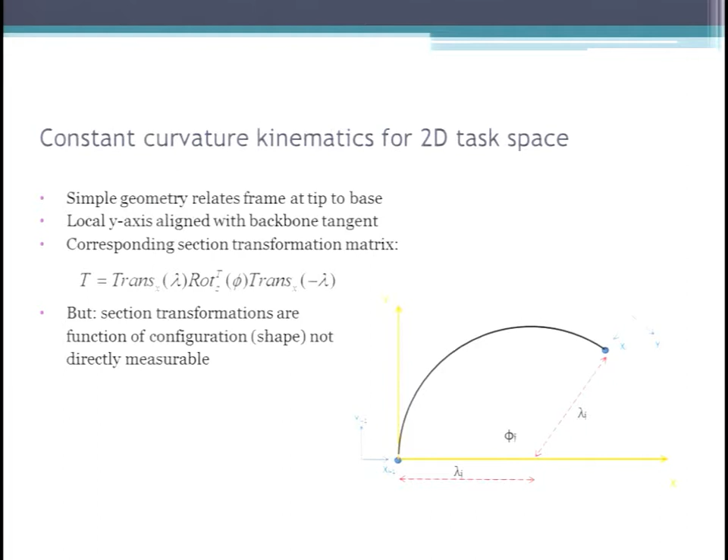Linear regression was used and it was found to be effective, and the results agreed well. Thus, in conclusion, the cable robot hardware is the first prototype of a long and thin continuum robot with a compact actuation unit and its forward kinematic analysis.

I look forward to the opportunity to discuss this paper further with you at the upcoming interactive sessions. Thank you.

Hello everyone, my name is Ali Akbar Al-Amdani from University of Buffalo. The title of my paper is the Kinetostatics Optimization for Adjustable Four-Bar Mechanisms for the Leg Wheel Subsystems.

The articulated wheel robots exploit the benefit of both legged and wheeled systems. By adding articulations in this system, we increase the number of degrees of freedom in the system. This number of degrees of freedom has to be controlled—either with active actuation, or in a semi-active way, or in a passive way.

There are some challenges and opportunities. There's no systematic effort to design the articulated leg wheel system that has ever been considered; all of them are based on intuition.

We are looking for the greatest motion ranges between the wheel axle and the chassis, and we are going to reduce the overall actuation requirement by a spring assist. For enhancing the terrain accommodation, we propose the adjustable four-bar articulated leg wheel subsystem and active structural control to adapt system parameters to terrain traversal.

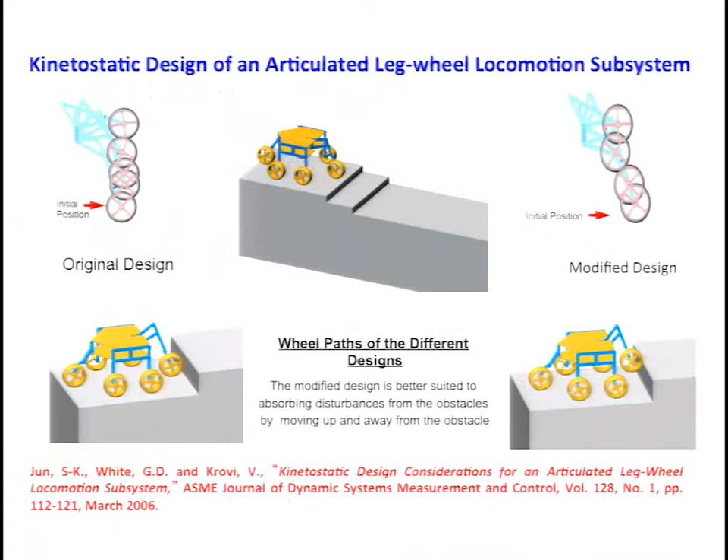Going further, we focus on the adjustable four-bar mechanism. The design process starts with position and velocity analysis, then moves to kinematic synthesis. In kinematic synthesis, we determine the length of the individual links that make up the mechanism to perform a desired motion generation. Then in the kinetostatic synthesis, we guide the attached wheel through several positions while supporting a set of specified external loads.

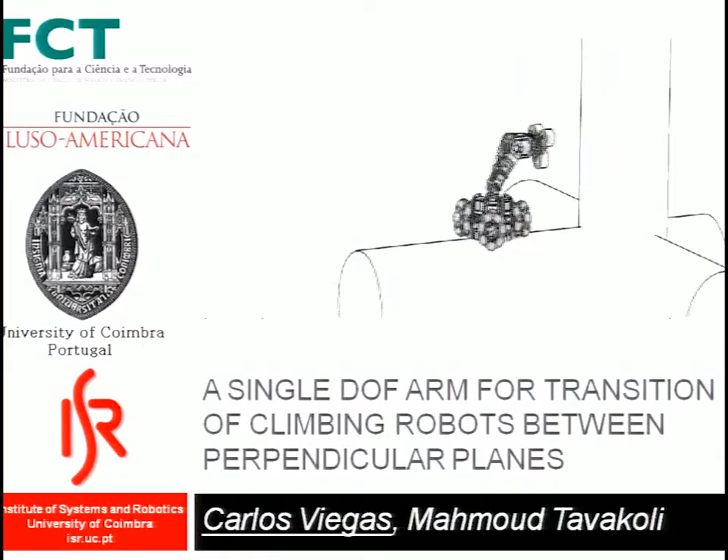Today I'm going to present a single degree of freedom arm for transition of climbing robots between perpendicular planes. Climbing robots are very useful tools for inspection of human-made structures. However, they face some challenges because these structures are mostly three-dimensional, including obstacles such as ridges, flanges, gaps, bends, and branches. So the climbing robot must be able to overcome such obstacles.

Our goal was to develop a transition mechanism which would be compact and lightweight and would enable the robot to overcome these obstacles. To test our mechanism, we used this small and lightweight climber that we developed at our lab.

Our concept was to use a system with two joints that would rotate simultaneously, as you can see in the video here. One joint would rotate 90 degrees, while the second joint rotates a full 180 degrees. This could be easily performed with a single actuator and a transmission mechanism. However, these two joints should be driven with a time lag in order to avoid collision with any of the surfaces.

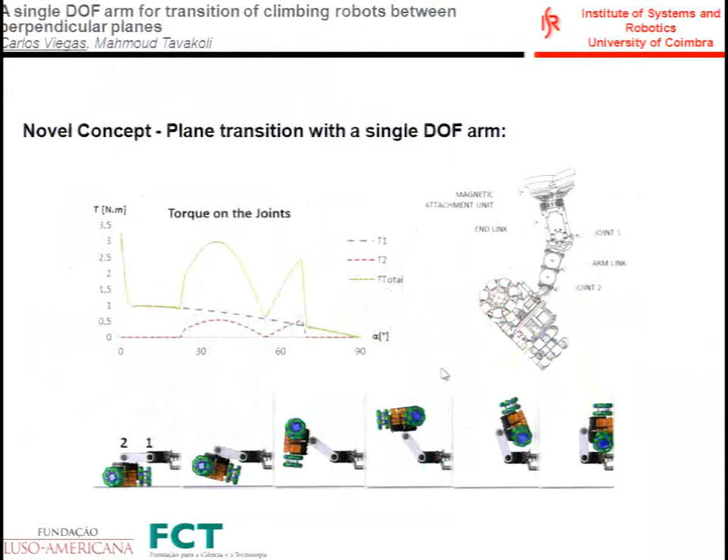This is a detail of the mechanism we developed. I will explain further details in the interactive session. This is the magnetic attachment unit that we developed. It is capable of adapting to both flat and curved surfaces, and it uses magnets to connect to the surface. Now I'm going to show you a video of the mechanism in action.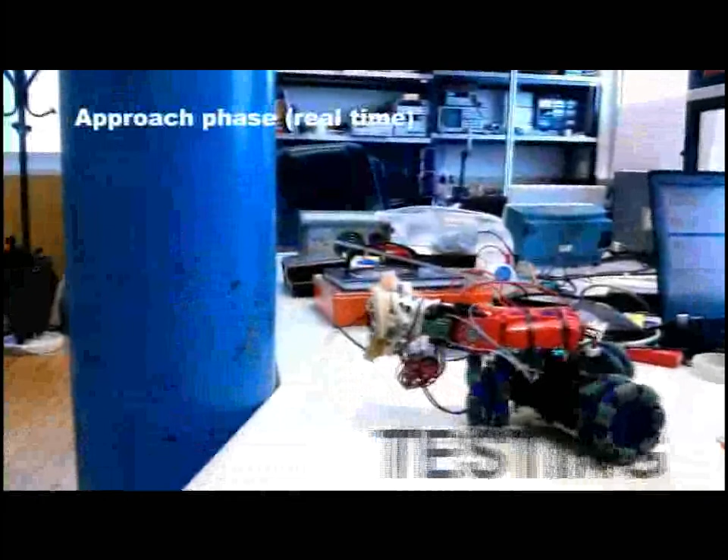This is all real time. You see the approach phase of the robot, then it connects to the structure, and then the transition phase. Thank you for your attention, and please come see me at the interactive session. Thank you.

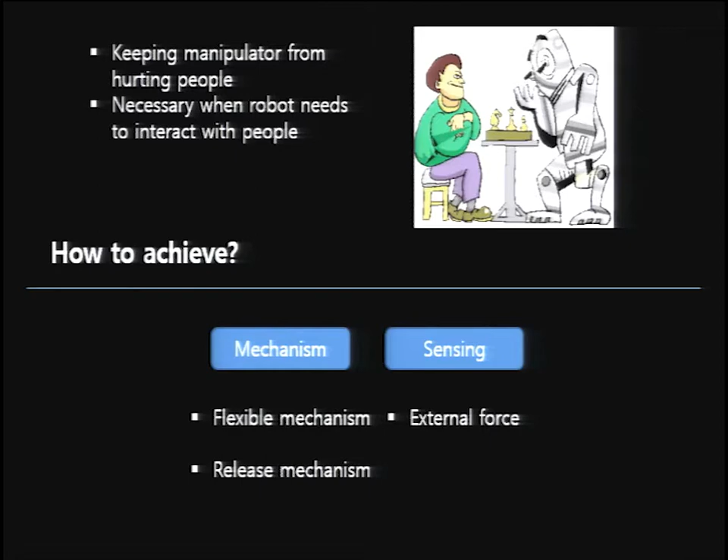The sensing function of the external torque was developed by measuring deflection of the flexible parts. So we can make soft contact, and the impact force is reduced by using this flexible mechanism and external force sensing. Then the excess contact force could be cut off by the release mechanism.

From this basic idea, we made the safe joint mechanism, named VCSC. The flexible mechanism and the release mechanism are composed of a ball and cam plate, and we use a cheap and simple distance sensor for external force sensing. This figure shows the structure of our mechanism.

The flexible and release motion is generated by this ball and cam using the spring force. So we can design the suitable spring set and the shape of the cam plate to meet our target flexibility property and the target value of limit torque for the release motion.

We have one more plate, and this plate is in contact with the other side of the spring. So if we rotate this plate, the pre-compressed length of the spring is adjusted, and then the property of the flexible section and the release torque are changed.

In our idea, the motion of this compensation cam plate is mechanically synchronized with the joint motion of the manipulator. By using this function, we can eliminate the effect of the changing gravity force when the position of the joint link is changed.

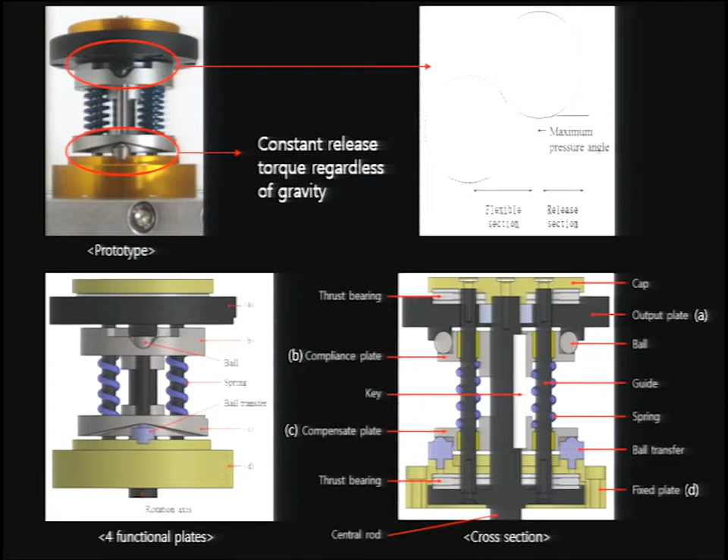So the delta value of input torque to generate the release motion is maintained as a constant value. The motion of VCSC is like this video.

This video shows the flexible motion, and if we apply torque over the release limit value, the release motion occurs as in this video. When the angle of the base is changed, the pre-compressed length of spring is changed as in this video.

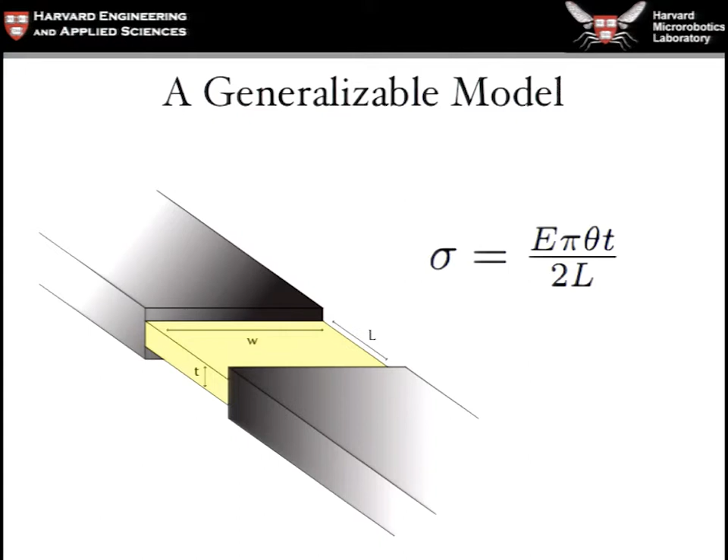Finite element analysis of the hinge modeling was validated using our previous model, which matched almost exactly with the FEA computations for the stress on a hinge with purely axial loading. When including off-axis effects, the FEA computation showed stress was greatly magnified, explaining why our hinges had been failing so quickly.

A preliminary investigation showed great improvement in hinge lifespan when lengthening a hinge. Compared to other stress-reducing features aimed at minimizing the point stress on the corners, just lengthening a hinge by 40%, as shown here, resulted in a great leap in hinge endurance.

These results were verified in a more comprehensive study of many hinges with differing lengths, demonstrating a very strong correlation between increasing length and increasing lifespan.

Following these principles, we designed a new hinge for the RoboBee that lasts about 30 times longer, or about 9 hours. Thank you.

We all know that 3D printed parts are everywhere and becoming more ubiquitous, but there are still a lot of limitations on what you can utilize these parts for, largely because of the limited strength available in the materials for the more common 3D printed processes. So we wanted to see what we could do to improve the strength of 3D printed components without really changing the process all that much, while retaining a lot of the benefits that 3D printing provides.

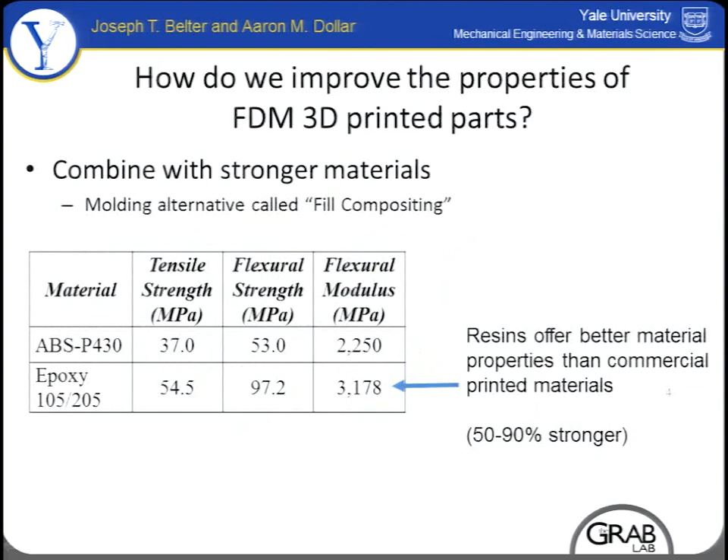And so the idea is fairly simple. We basically look to stronger resins and try to make composite parts essentially by filling voids in the components with these stronger resins.

So as I alluded to, the essential process here is that you take the original part model that you might have printed solid in ABS. We're looking mostly at FDM printers, and you design in some voids, either channels or meshes, into the part that you then, after printing, go in and fill with higher strength resins in order to get a composite material. We call this fill compositing.

So the bottom image here just shows injecting a part with resin afterwards, with the final part given here. So we tested pretty systematically a fairly large number of different options against the baseline FDM parts and the solid, a couple of different epoxies, as well as some different fill options, and I can tell you about the details of these.

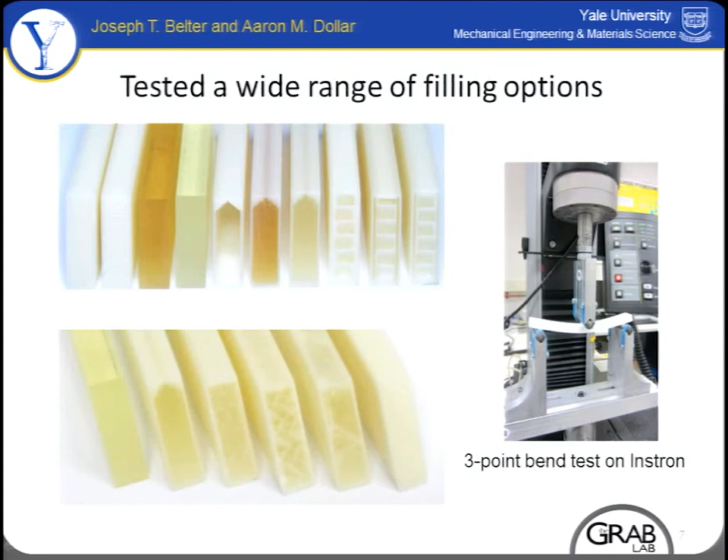And we tested them all in a standard ASTM 3-point bending test on an Instron. We also tested them, besides just these standard bar components, in some more robotic application components. And basically, the result was a substantial increase, depending on the specific application, in strength and stiffness for these components. And it's a fairly straightforward process to implement.

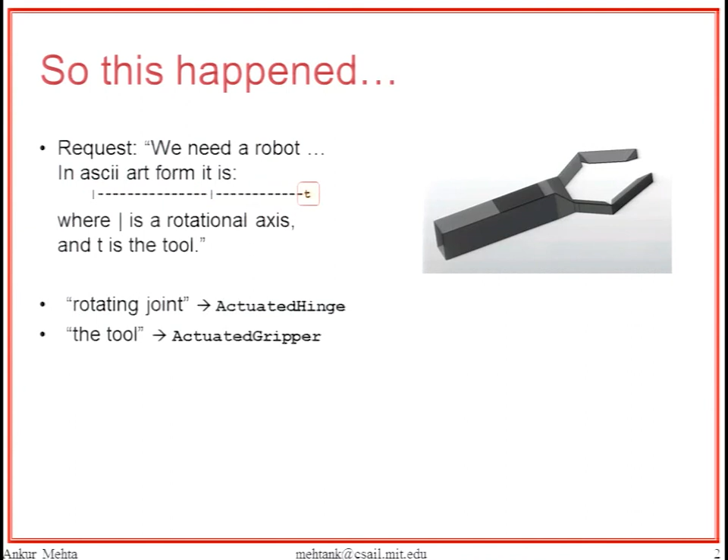This creates user-programmable robots on demand. First, let me share an email we received from a colleague requesting a custom robot based on a loosely specified design. Typically, creating such a robot would require several CAD and manufacturing tools, drawing from expertise across engineering disciplines, in a potentially time-consuming and expensive process. Instead, we can identify the structural specifications with hierarchically composed library elements from our system, which can then simply be connected to form the final robot design.

Though this image only displays the mechanical structure, the system also defines electrical components and wiring, microcontroller code for firmware drivers, and a high-level user interface, generating, in short order, fully integrated, directly fabricable designs for an immediately functional robot.

More generally, a user starts with an idea for a desired electromechanical device and breaks it apart into functional elements. If these elements do not yet exist in our design library, then the process can recurse on the simpler functional elements, hierarchically building up ever more complex assemblies from a set of basic building blocks and previously generated designs.

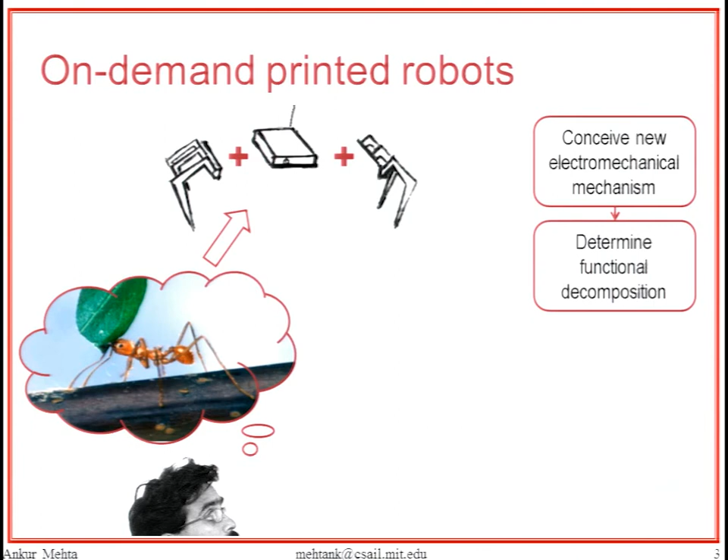Once a satisfactory decomposition is found, the user assembles these components using an intuitive design script. This script is then compiled to co-generate the integrated, fabricable designs.

This robot compiler is built upon a number of algorithmic and computational developments. A scripting language defining mechanical fabrication was extended to include definitions of electrical and software elements in a unified, functionally defined abstraction. This encapsulates the computation required to generate the fabricable designs from each parameterized module.

These modules extend the design library of mechanical building blocks to also include discrete electric and electromechanical devices, along with firmware drivers, software blocks, and user interface elements.

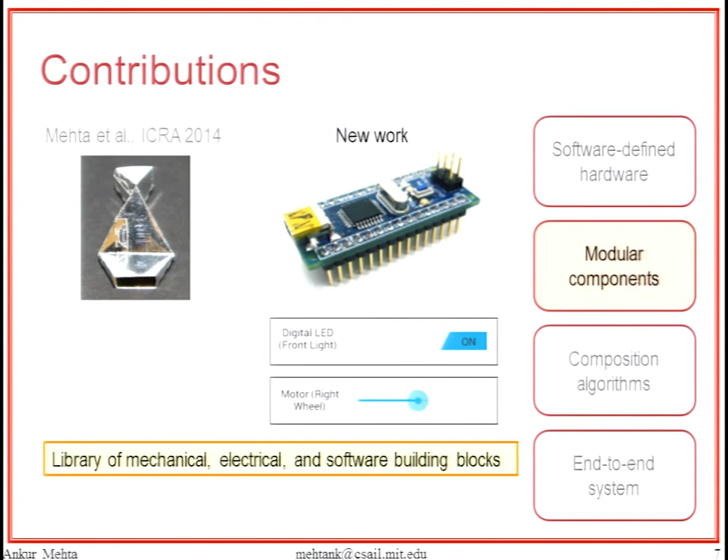A collection of algorithms hierarchically combine these modules across subsystems to generate integrated, programmed electromechanical mechanism designs from their constituent building blocks. Finally, all of the above are wrapped into an end-to-end system that allows the user to compile an assembly of mechanisms into a collection of directly fabricable mechanical, electrical, and software designs, yielding fully functional robots.

This compiler was used to assemble our library elements into several different robotic designs, and I invite you to come play with our auto-generated robots as you learn more about this design system through our interactive session. Thank you.

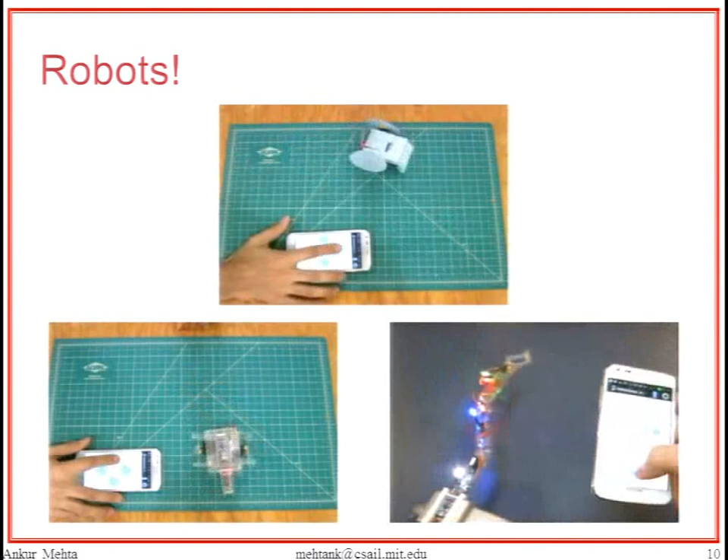Hello everyone, I'm Ryu Ozawa from Ritsumeikan University in Japan. This work was done by my ex-student Yuki Mishima, who is now working at the Kubota Corporation. In this research, we address a design issue of an actuated robotic finger with a special transmission.

Recently, the design of an actuated robotic hand has become a very hot topic for applications in adaptive grippers and prosthetic hands. Adaptive grippers are usually required to simplify the control method, and when designing a prosthetic hand, we need to consider the trade-off between decreasing weight and size while increasing grasping function. The conventional solution to design this robotic hand is to combine several under-actuated fingers, each driven by at most one actuator.

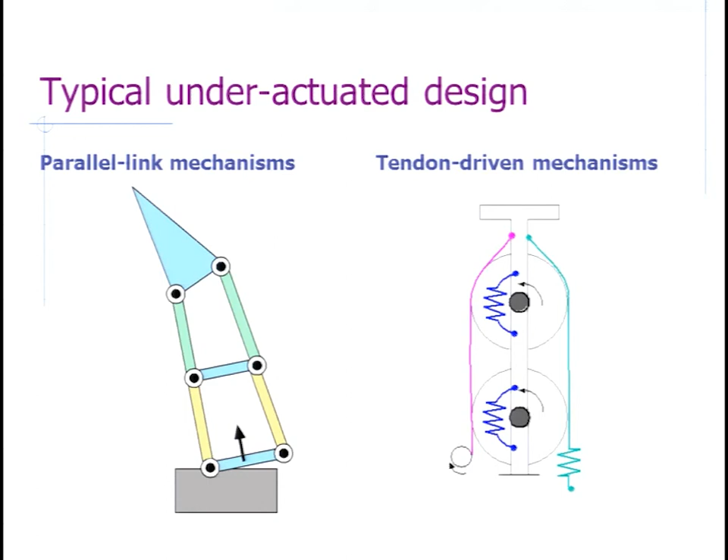As a result, we can realize coupling motion like this in free space without using large actuation power, and we can also realize connecting motion like this, adaptive motion like this, when the finger contacts with the object. This design also simplifies the assembly.

And we also brought some small mock-ups. I hope to see you in the upcoming interactive sessions. Thank you very much.